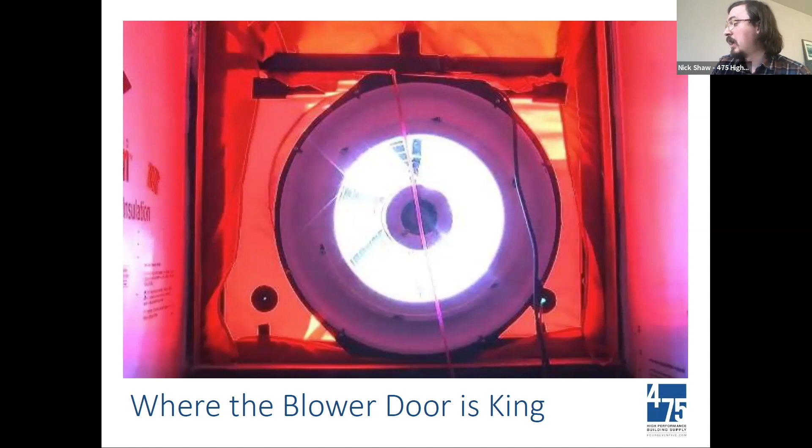I'll sound like a broken record about how important air tightness is. For those who don't know, the blower door is a giant fan used to pressurize or depressurize the building envelope, so on site you can literally measure how airtight the project is. That air tightness metric is something we work into our energy models and size our systems based on.

We do like to really prioritize air sealing. I'll be talking about air tightness, which is different than vapor control, which is different than water control, bulk water, which is also different than thermal control. All of this is a holistic approach where we're balancing these different things. But we prioritize air sealing a lot more than thermal insulation, thermal control, or vapor control, partly because air is where most of the moisture is coming from.

Air is inherently really wet, really moist. This is a study from the Building Science Corporation looking at one heating season, one winter. Gypsum is airtight but vapor permeable, so just through diffusion we get one-third of a quart of water move through it. But when we puncture a one square inch hole, we get 30 quarts of water. So air is really moist, it's really wet. We really want to prioritize air sealing.

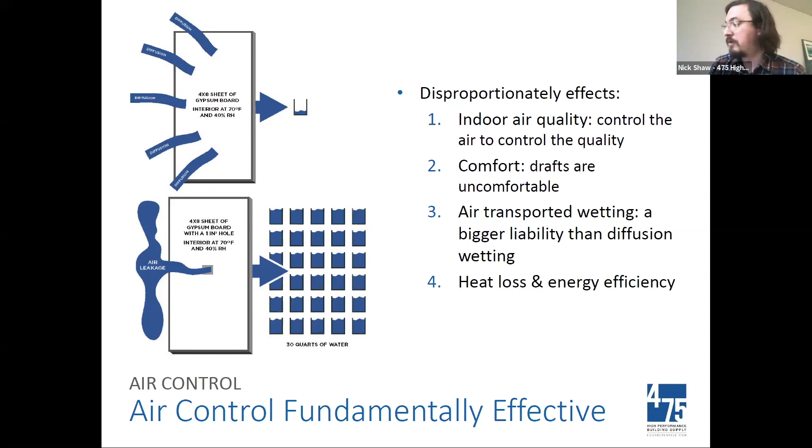Ideally, we prioritize air sealing on both sides of the wall assembly. On the exterior, where it'll be your house wrap, that's typically vapor permeable for climate zones 4 and up. And then on the interior, we're having it double as our vapor control layer using vapor variable membranes nowadays.

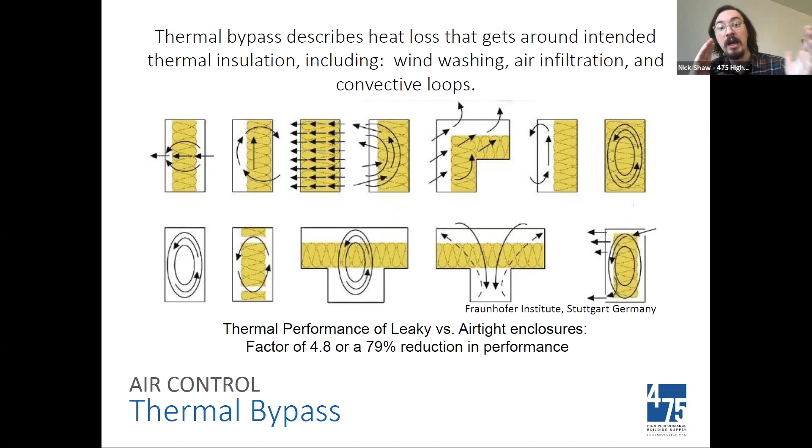Along with air being really wet, there's this idea of thermal bypass or wind washing, where you can get air convection loops moving throughout your insulation layer. When a manufacturer gives you the R value of a material, that's from a lab facility where it's airtight on both sides of that batt, board, or blown-in loose fill. A job site is not a lab facility, and things can go wrong, and we can get wind washing within our insulation layer. That can greatly reduce the R value up to 79%, so that's fundamentally a different wall assembly at that point. That's one reason why we prioritize having air sealing on both sides of our insulation.

This is the PHPP summary sheet, the International Passive House Certification Energy Modeling Program. It's actually the world's first passive house project, completed in 1991 in Darmstadt, Germany. This is just a theoretical exercise where we're leaving everything about the project the same—same R value, same building orientation, everything's the same. We're just changing how airtight the project is within the energy model to see how that affects our annual heating demand and our heating loads. It's in metric, but we can get the gist of it.

So 0.22 ACH 50, air changes per hour at 50 pascals of pressure—that's a volumetric measurement of air tightness. At 0.22, that's incredibly airtight. Passive house for new build is 0.6. So when we're at 0.22, we're showing 14 kilowatt hours per square meter, or 10 watts per square meter. That's extremely energy efficient.

That's very, very airtight. We then move to 0.6, which is the passive house standard for new builds under the international certification—we're now at 12 watts per square meter. We then move to 1.5, which I'd say is like the Pretty Good House approach, or what Building Science Corporation recommends—we're now at 17 watts per square meter. We then move to 3, which is current code for climate zone 4 and up under the new energy code, and we're at 25 watts per square meter. Then we move to 5 ACH 50, which is old code, untested, unverified, doesn't really mean much, and we're at 36 watts per square meter.

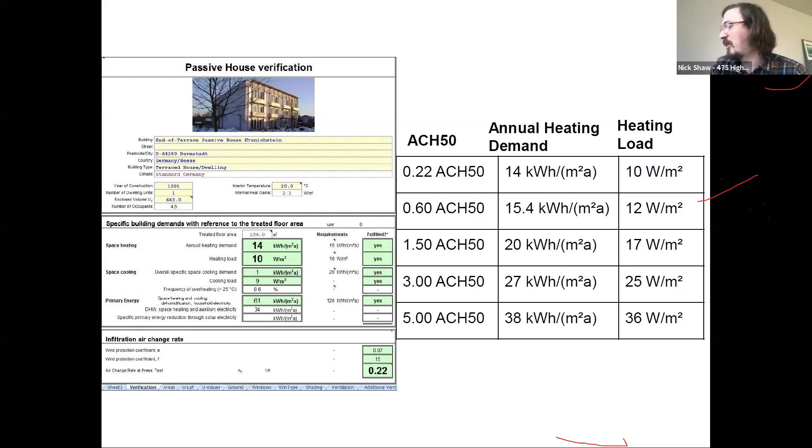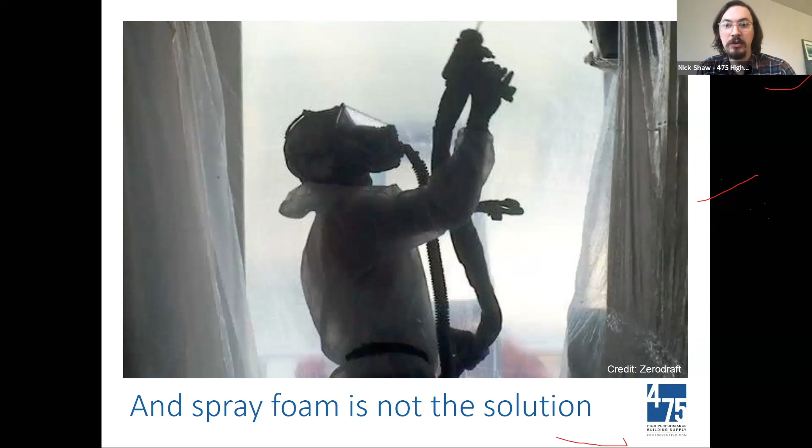So we're really prioritizing air sealing nowadays. At 475, we like to say less is best when it comes to spray foam or any foam-based material. We're not really seeing spray foam as part of the solution. Rigid boards can have their place when we're comfortable being vapor closed, but in general we want to avoid foam-based materials. It's partly because of the toxic ingredients—it does off-gas, it's a flame accelerant, it's unreliable for performance, it's actually not dimensionally stable and will shrink over time and uplift off of the substrate.

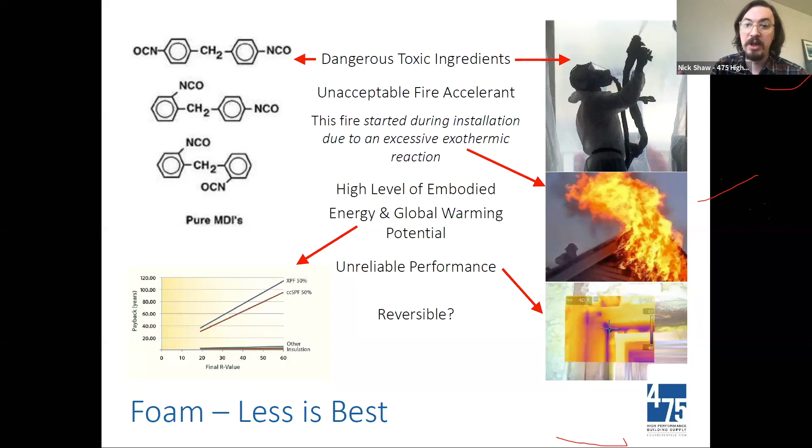But a big reason is the environmental impact. Passive House is really all about the operational carbon use—how much energy it takes to heat and cool the building. But we're also trying to consider the embodied carbon—how much energy it takes to extract raw resources and turn them into a building material. We know we need to prioritize this because climate change is a crisis. It's happening right now, and we need to do what we can to actively reverse or mitigate it. So we really prioritize embodied carbon, using plant-based materials—materials that were carbon sequestering when alive, then we cut it down and turn it into a building material so it's carbon storing. That would be like any plant-based material.

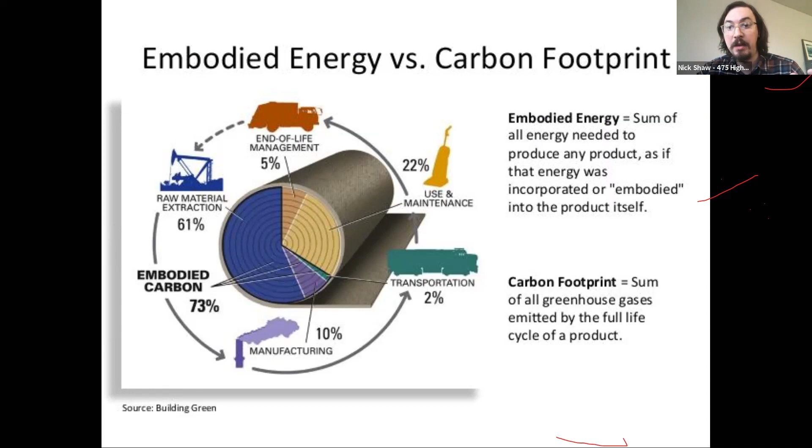There have been different studies done showing that, looking at 2050 as our timeline, operational carbon is a big component, which is what Passive House is all about. But our embodied carbon—our material sourcing—heavily outweighs our overall energy performance. That's carbon loading that happens on day one, while operational carbon use is over the lifespan of the building, how much energy it takes to heat and cool it. So we really need to address the immediacy of climate change, and we do that through our material selection, so we can actually make our buildings carbon negative or carbon storing for the lifetime of the project.

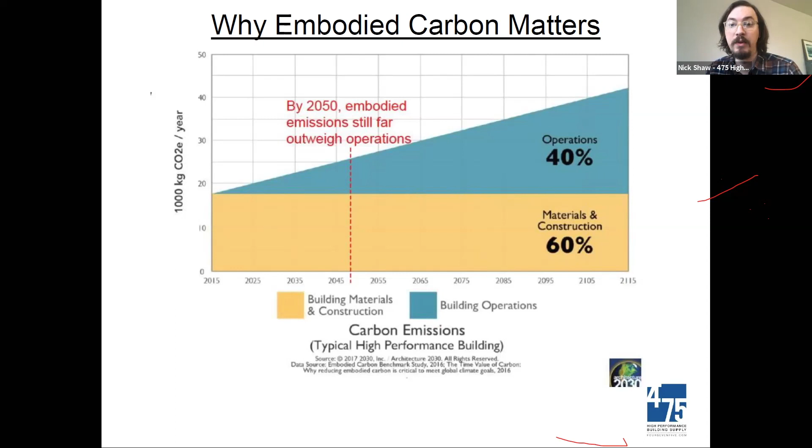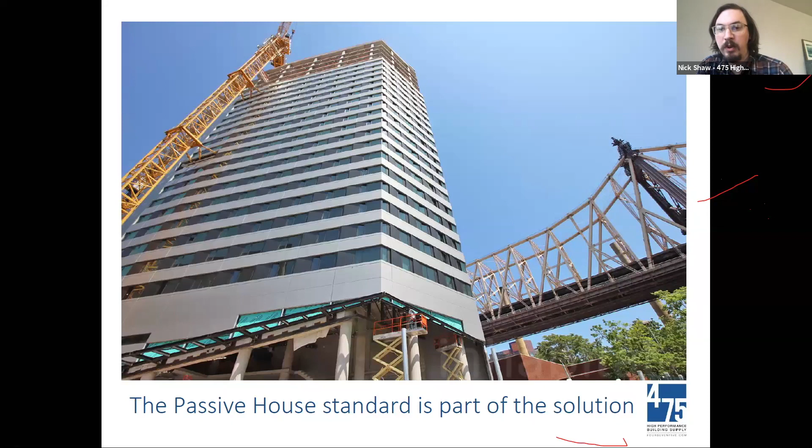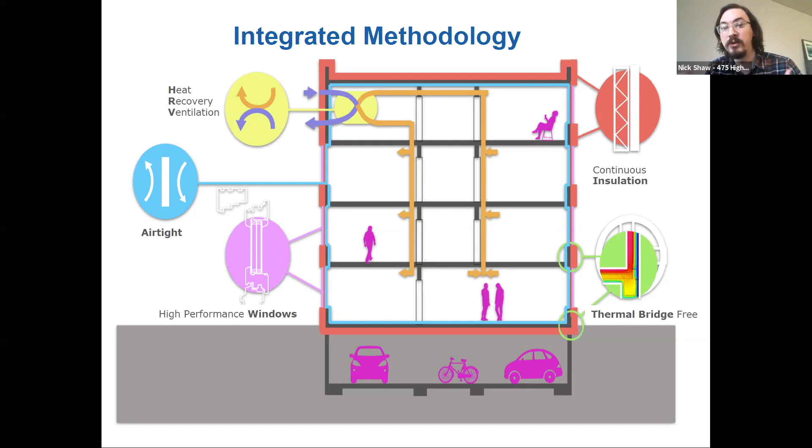This integrated methodology is rooted in continuous insulation, thermal bridge free - really thinking of the building like a thermos, which does mean we need to have triple pane windows that are airtight. We're making the whole building airtight, and then we're putting in some mechanicals - an HRV, heat recovery ventilator, or an ERV, energy recovery ventilator - to be supplying balanced, fresh air that is filtered and coming in at a comfortable temperature. So we make the building airtight, and then humans need to breathe, so we put in some active ventilation with an HRV or an ERV.

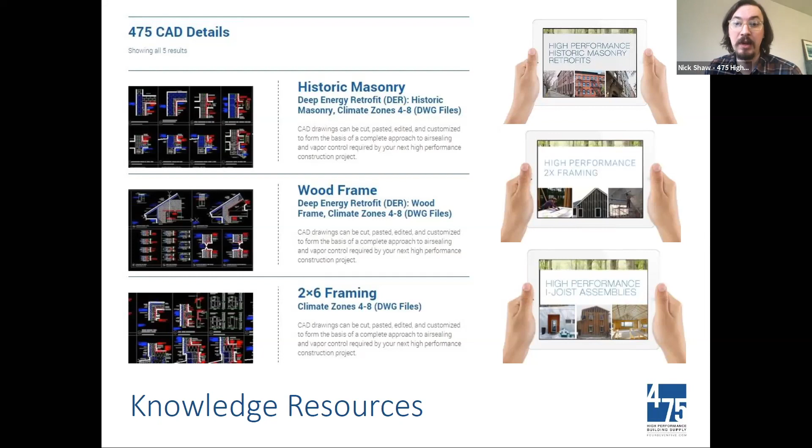So getting into the suite of materials that we offer - when I'm looking at wall and roof assemblies, I do have an order of importance of how I think about things. Shedding the water is number one - this is why we went into caves to begin with. Kick the water as far away from the building as possible. That's what architects are very familiar with. Then we're prioritizing air tightness, partly for the reasons I was getting into before, in terms of it holds a lot of moisture - it disproportionately affects other things.

We are building our walls and roofs very thick, or including a lot more materials, to really limit the amount of energy that moves through that assembly. Which means we're no longer baking our assemblies dry with our heating and cooling equipment, so we need to think about how that assembly is going to dry through diffusion. That's why we really care about the vapor permeability of the materials that we're using. Vapor control is different than air tightness.

Lastly, we're looking at thermal control, or R value - trying to be thermal bridge free, or really prioritizing having those warm interior surface temperatures, which will reduce condensation issues, but also create a much more comfortable interior for our occupants.

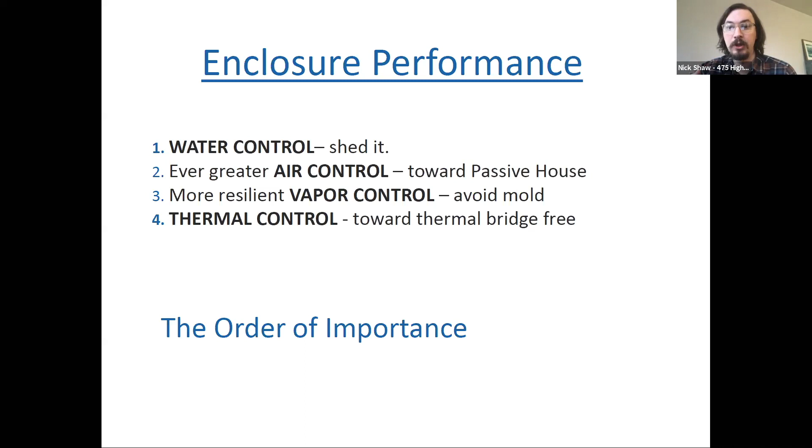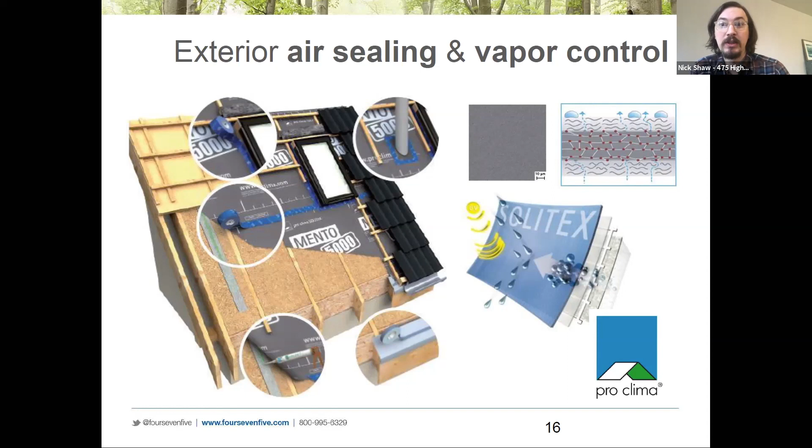The suite of things that 475 offers - we're offering membranes, tapes, gaskets for the exterior side of our assemblies. These are monolithic membranes that require active vapor transport along a molecular chain. Most technology previously available in the States was microporous membranes - these are membranes with little pores within them, and that's how they allow moisture to pass through. Those pores can clog or deteriorate over time, and wood tannins break down those micropores. So we're offering a suite of materials that are higher performing, more durable.

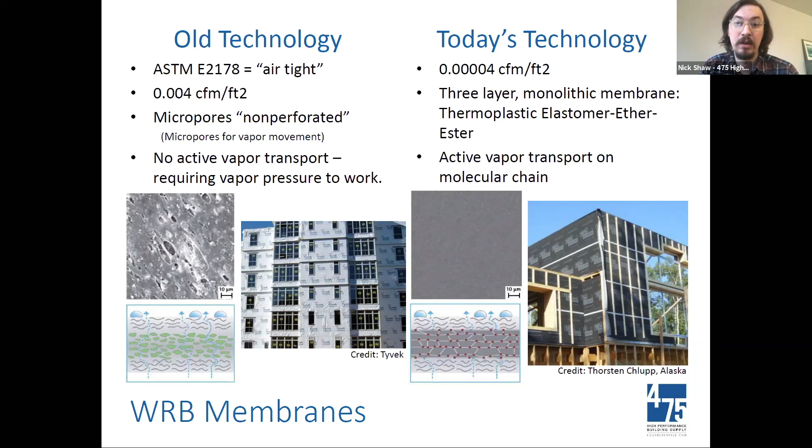What's nice about it being monolithic is that we can have the same membrane be the wall as well as our pitched roofs - that would be the Solitex Mento membranes or the Adhero membranes for a fully adhered version. So these are truly airtight, truly watertight, but vapor permeable or vapor open membranes for the exterior side of our assemblies. We do like to prioritize a rain screen for our walls, creating a drainage plane and an air gap behind our finished cladding for the walls.

If we have vertical siding, then we need to do what's called a counter batten approach, which is two layers of battens. Whatever's against the house wrap, your WRB, needs to be running vertically to allow that airflow and drainage. We're doing a similar thing for our pitched roof systems as well.

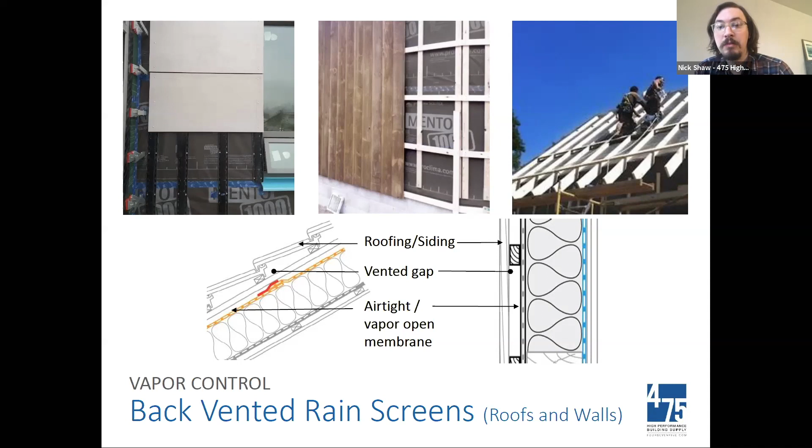I would say if you're having a roof pitch of 3-12 or greater, it is best to vent those pitched roofs. Oftentimes we want to have rafter tails for an aesthetic look or to create bigger eaves to kick the water away. That can be a thermal bridge concern, and with the rafter tail, it's also an air leak concern. So we're oftentimes doing what we call applied rafter tails.

Here on the left image, we're showing the same membrane as the wall and roof, acting as our water resistant barrier. Then we put in these notched timbers that are acting as those rafter tails, and we use that to start and then create our vented roof assembly, allowing drainage and airflow from the eave to the ridge.

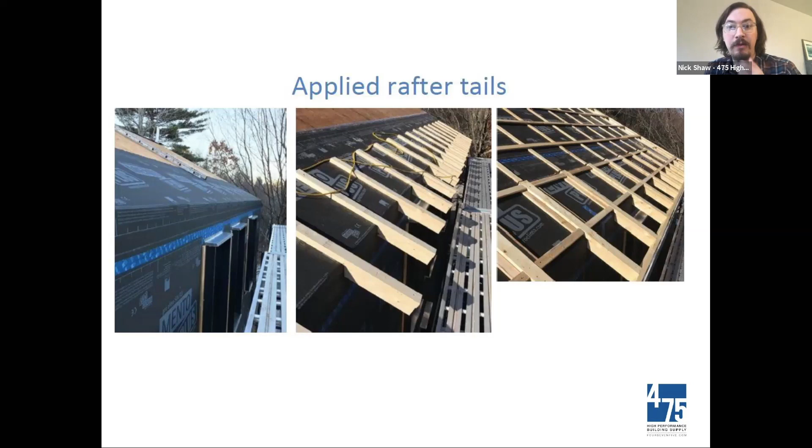You can vent lower pitched roofs, but you then need to make the vented gap even greater. But we are not venting flat roofs. Flat roofs need to be vapor closed up top because we could have standing water in those locations.

We have mechanically fastened membranes, but we also have peel and stick membranes, fully adhered membranes. This is the Adhero membrane. It's a really good solution for mass timber projects, really great to have all plant-based materials, full plant-based assemblies, whether it's CLT Cross-Laminated Timber, NLT, or GLT. These are different types of wood panels that can be acting as a structure as well as our interior finishes.

So for multifamily projects, we're using the Adhero membrane as that CLT protection on the floor to keep the assembly dry during the construction phase.

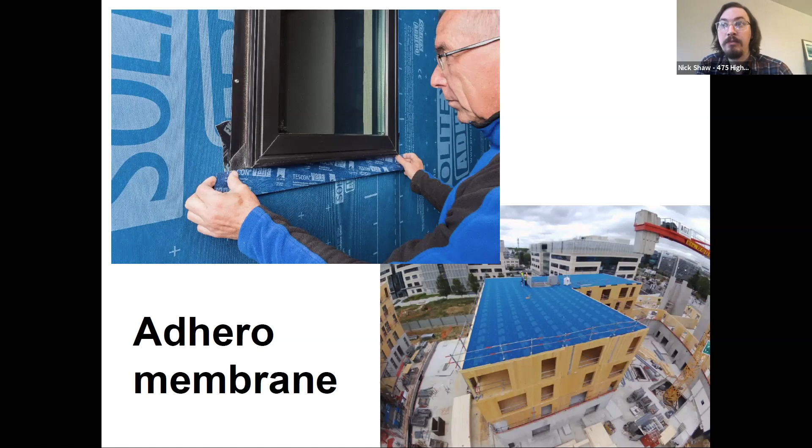Similar suite of materials, we offer fluid applied, which means brush on, spray on, or roll on air barriers. This is the Visconn, where we're using it to treat any uneven surface, such as masonry, but also to help with a lot of air barrier transition details.

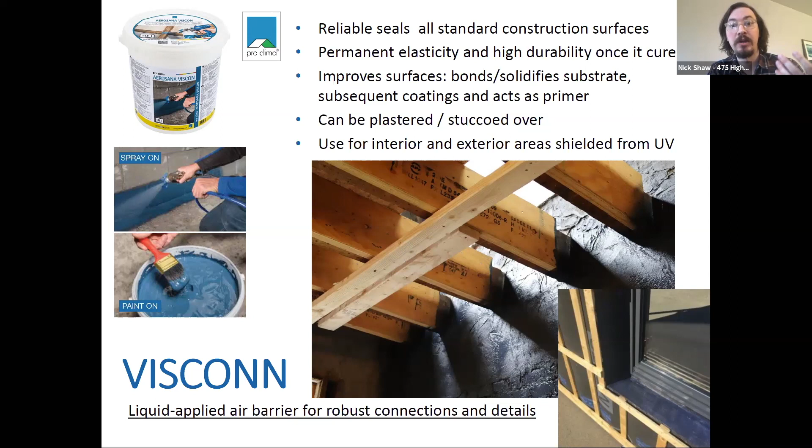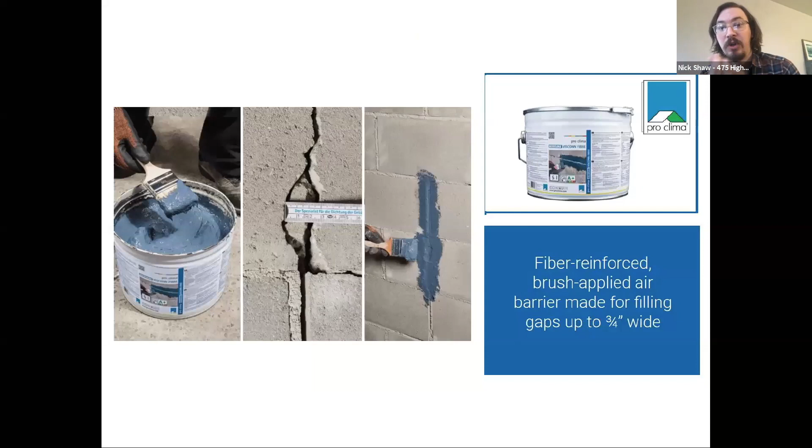Sometimes it's difficult to place a membrane, so instead we can be coating some framing or other material in the Visconn to act as that air barrier transition. We have the standard Visconn, but also a version with fibers built in that can bridge larger gaps. The standard version can bridge 1/8 of an inch, while this fibrous built-in one can bridge more like 3/4 of an inch. Upcoming, we'll also be offering a version of this that comes in sausage tubes.

And then there's this spray gun that attaches to your standard air compressor. This is a way where you don't need a different type of airless sprayer for the application—you can be using your standard nail gun compressor for this.

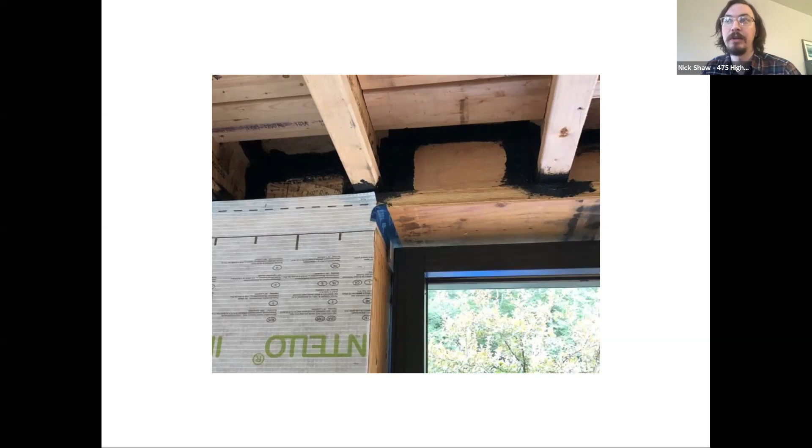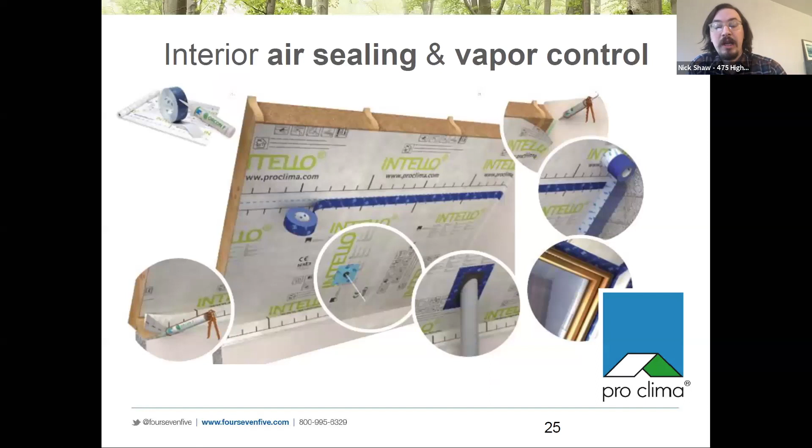Focusing on an interior air barrier, we offer a suite of gaskets, tapes, and membranes for the interior side of the insulation. Here we're showing the Intello membrane. The Intello membrane is actually vapor variable, so it is airtight, but changes its vapor permeability based on the relative humidity around it.

In the winter time, our vapor drive naturally moves from the interior towards the exterior. Cold air is drier air and holds less moisture, so we have a lower relative humidity. This membrane acts as a class 2 vapor retarder at 0.17 perms.

Our vapor drive actually changes direction in the summer. It's hot and humid outside, more comfortable on the interior, so the natural vapor drive comes from the exterior in. We have warmer air holding more moisture and a higher relative humidity. This membrane becomes vapor open, or vapor permeable, up to 13.2 perms, allowing the assembly to dry inwards through diffusion. We're opening up before we're at risk of mold growth.

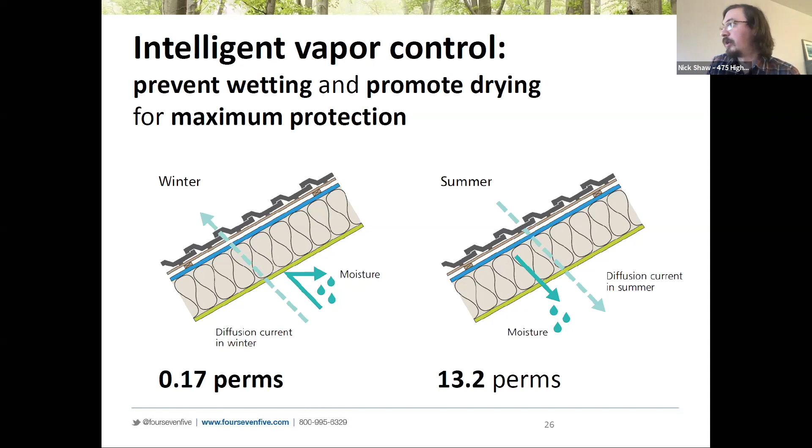At about 70% relative humidity is really a throttle point, where we want to go from as vapor impermeable to as vapor permeable as possible. Mold grows or accumulates at about 80% relative humidity, anytime you're above 41 degrees Fahrenheit, below about 104, at 80% relative humidity. So we want to allow the assembly to dry inwards through diffusion before we run the risk of mold growth, which is why that 70%-ish relative humidity is kind of a throttle point.

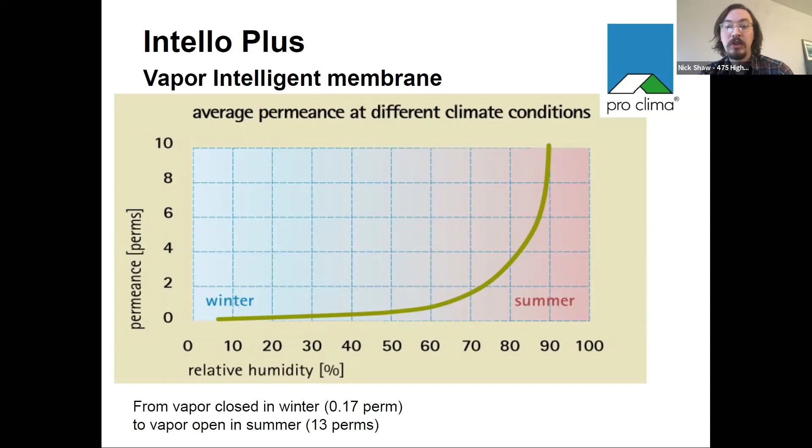Some other membranes open up too soon or too late, and we've really found through testing that this Intello membrane opens up at that sweet spot. So we're greatly reducing moisture risk within our wall and roof assemblies.

In general, we do want to prioritize an interior air barrier. There are two different approaches for durability of these high performance assemblies. One is to do a dew point analysis, putting enough exterior insulation to warm the sheathing layer. That's a fine approach, but it doesn't really account for how quickly our climate is changing, and we've been seeing more natural disasters and greater changes in weather patterns, showing that we can't really work with existing climate data as much.

So another approach is having an interior air barrier. This holds your warm conditioned air off of the colder sheathing surface. Now we don't worry so much about that dew point analysis, where we're letting the sheathing layer get colder - we're just holding our warm air off of it. That's how we're preventing condensation against that sheathing layer.

It also means the air barrier is in a location where you can mend and fix it. So if your builders aren't quite hitting the blower door numbers they want, they're able to access that air barrier and fix it up. It can now also double as your vapor control layer, and that's where that vapor variable membrane with the Intello becomes really key. Just having an interior air barrier that's vapor permeable is really helpful, but you get even greater risk reduction when that interior air barrier is vapor variable, or smart. That's what the Intello membrane is offering.

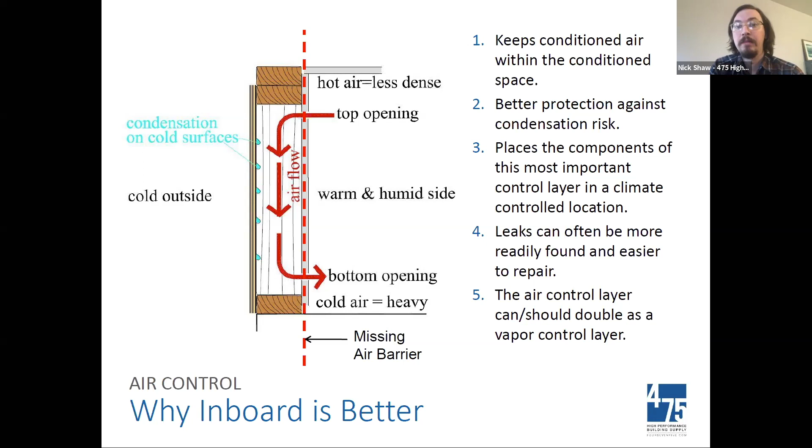This is right behind the drywall, and we need to protect it. Think of the drywall as a sacrificial layer, not as an air barrier. You can go online and read about the airtight drywall approach, but it has a lot of durability concerns - every time you hang a picture, it's compromising that drywall airtightness.

Instead, we're running a service cavity. This protects that Intello membrane, but it also creates a chase for us to run our electrical equipment, so we're not piercing or interrupting that Intello membrane. It makes our buildings more adaptable - it means the next homeowner can come in and run new electrical without interrupting the rest of that structure, that's good for 100+ years.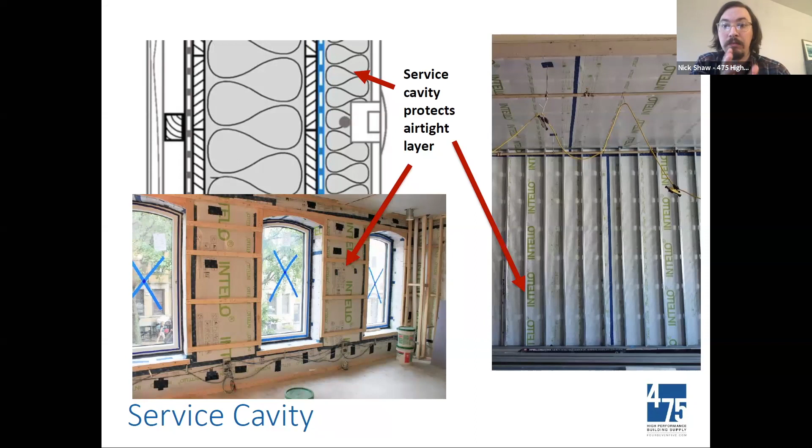So we're allowing access to certain areas of the assemblies while limiting access to other areas that have longer timelines for maintenance. This is also a location where you can throw in another batt of insulation if you need some greater R value. The depth of the service cavity is really just based on the depth of your outlet boxes, or whatever you want to place in there. I am seeing plumbing being kept all on interior walls, because those are much bigger diameter pipes, which would make our exterior walls even thicker.

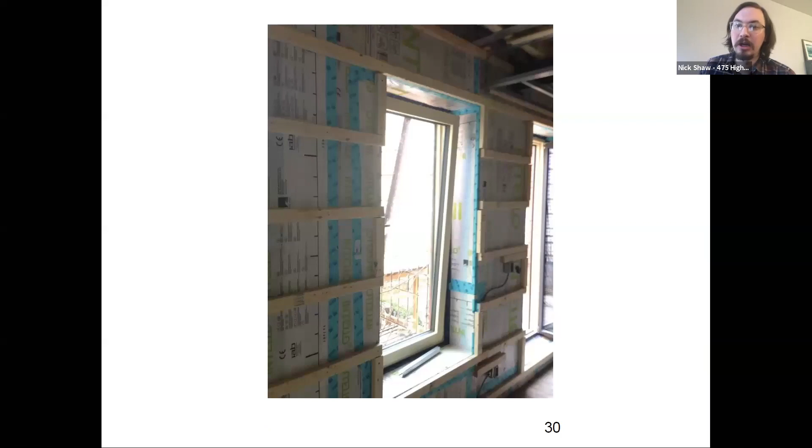Here we're showing that service cavity coming into a tilt turn window. The window is being taped directly. The window is your air barrier in that plane, as well as your vapor control layer, your insulation - we're asking a lot out of our glazing. We are using triple pane nowadays.

That interior air barrier will pose sequencing concerns for your contractors. They need to know about these interior air barrier transitions, and this does happen at the framing stage of things.

So the image on the left is a construction team putting in just a sliver of this membrane, or a floppy bit, as we say, of the membrane. And then they come in and frame in an interior wall. If they didn't place this little floppy bit of membrane, now that interior wall is interrupting where we would want that air seal. So that does complicate these types of details. If they know and have this air barrier on site at the right time, it will keep the costs down.

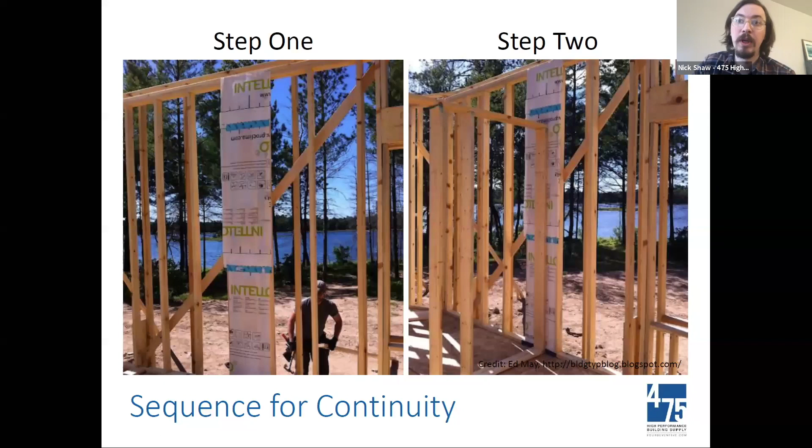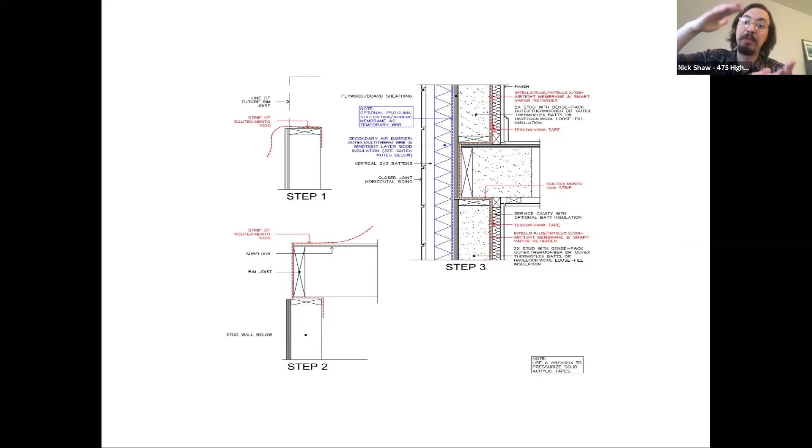This will happen at our floor transitions as well. You can just put a ledger directly over it and run a continuous seal. Or a lot of folks call it wrapping the rim joist, where you're putting the floppy bit of membrane onto the top plate, setting down your floor structure, lapping this membrane over and around the rim joist, and then framing your next wall on top of it. So your subfloor assembly is pinching the membrane between the top plate and bottom plate of the walls above and below, and now you have these floppy bits of membrane that you can tape down the line.

So you will see these loose bits of membrane on site during the framing process of these projects. This is just keeping folks moving real fast and staying on schedule, but it is something that they need to know about and have these materials on site during the appropriate times.

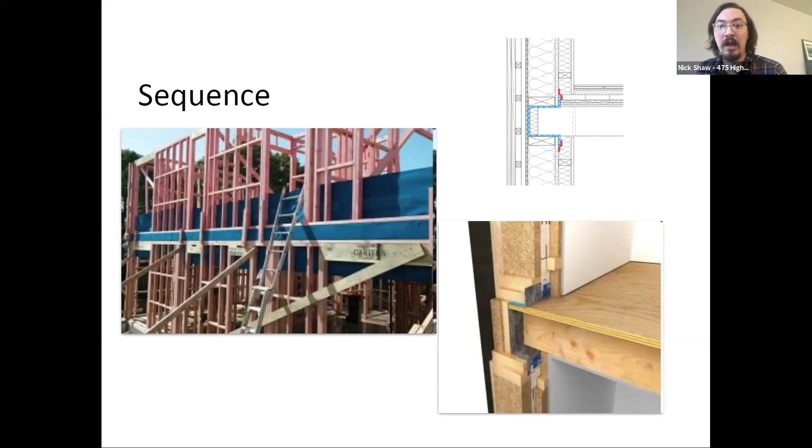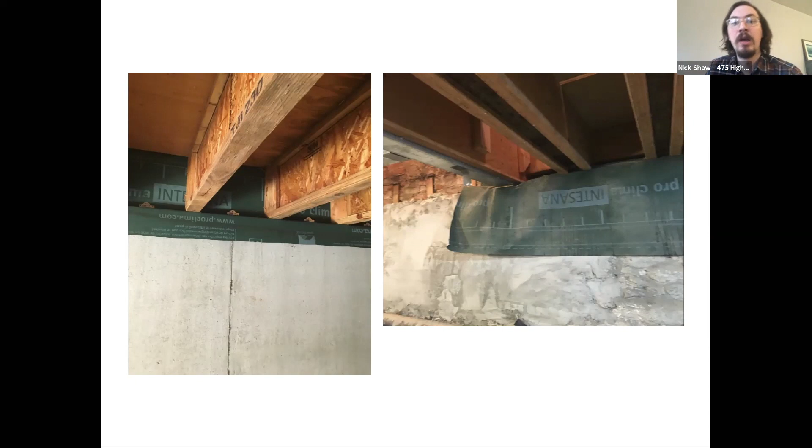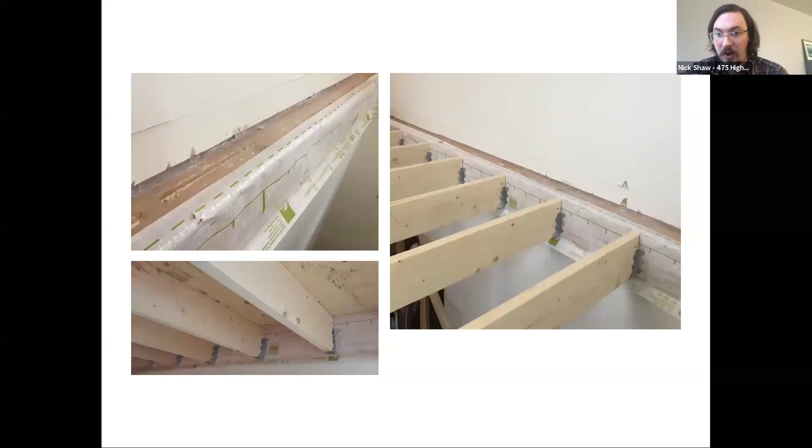Here we're showing just placing this membrane during the framing stage. We like to use a fairly robust membrane at this location, that can be the Intello X membrane or the Mento membrane, because we are creating quite a few pinch points where we want to make sure we're not tearing the membrane. You can fasten directly through the membranes, install with staples. You just want to hit the structure behind it to pinch the membrane at that fastener. Here we're showing just placing your joist hangers directly through the membrane, and now you're taping to it above and below. So there's a variety of ways to do these types of air barrier transitions.

Flat roofs, kind of coming back to that for a second. For flat roofs, we are not venting them. There's no pitch to create a pressure differential. The pitch is solely just for some drainage. We will have standing water up there. So we want to be all vapor permeable because the top is vapor closed. Or if we are using a rigid foam board, we want to make sure we're not creating a vapor sandwich with anything plant-based in between, nothing that could break down or deteriorate from moisture damage. So if you're topping with a rigid foam material, make sure your protection board is a masonry sheathing board and not a plywood or OSB plant-based material.

On the underside of the deck, we're getting a lot of fibrous insulation, natural vapor permeable, that could be mineral wool batts or cellulose, and then we're running the Intello membrane on the underside. The Intello becomes particularly key, one, to have an interior air barrier, but two, for that vapor variability, because the exterior is vapor closed. So now we can't dry through diffusion towards the exterior, so we can only dry inwards. We don't want to moisture load the assembly when it's trying to dry inwards.

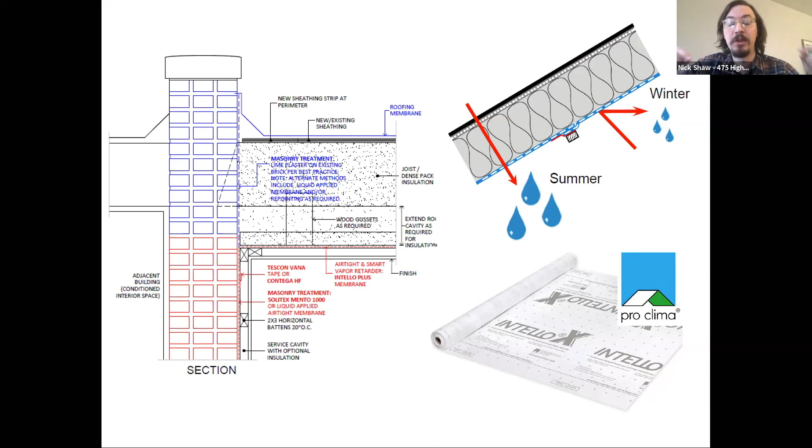So check out, we have a blog post specifically called 10 Golden Rules for Foam Free Flat Roofs, and that'd be a good blog post to be looking at for flat roofs. They are inherently tricky, and now we're also mounting photovoltaics up top. We're putting a living roof up top, which is making things even riskier because now we're not getting the solar gain on that membrane to push the vapor drive inwards, but it's still achievable.

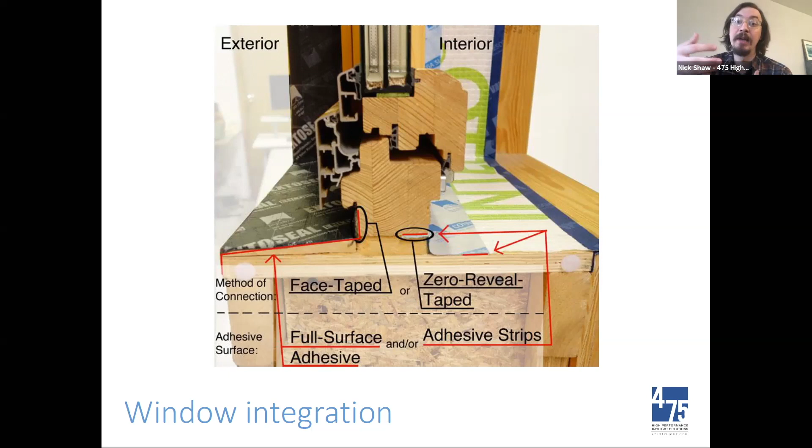We are taping to our windows and doors. The caulks that folks used to use would harden and crack over time, so it's not a reliable air seal. We also want to be vapor permeable, so we're not can-foaming in windows anymore. We're vapor closed on the exterior sill because we could have standing water on that horizontal surface, but otherwise we want to be vapor open as much as possible. We don't want to vapor dam, especially where we have a high temperature difference, which is more likely to have condensation concerns right there.

The corner taping is a little bit of some funny origami with the tape. I do oftentimes have contractors pre-cut their corner taping, go around and install just the corners, and then come back and do the rest of it in long strips.

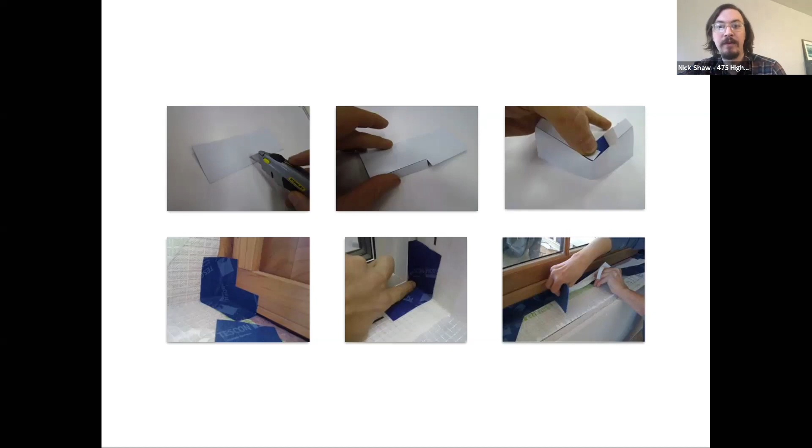It's an easier way to maintain quality control because the corners are the higher risk point for these installs. We can pre-tape windows. Triple pane windows are incredibly heavy, and not all projects have the opportunity or luxury to be able to put it on a sawhorse and pre-tape it. But if you are able to do that, it will really simplify things.

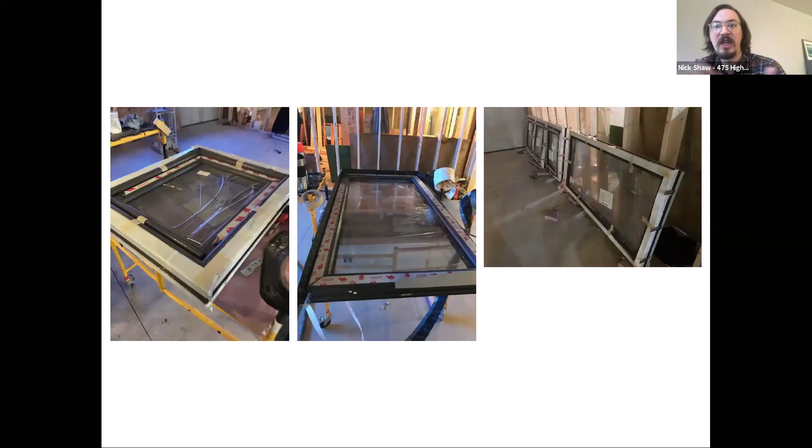You use painter's tape just to hold your air sealing tape down in the meantime. Then you set your window in place, stuff your fibrous insulation. Here we're showing mineral wool, and then fold that tape up and get your final air seal connection there.

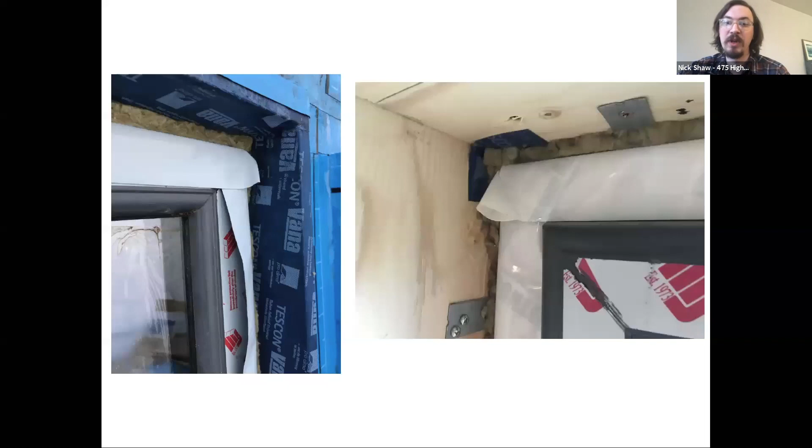Here we're showing a plywood buck on the right and some Vana on the left image. For the plywood buck, you would want to tape the seams as well as the end grain of the plywood, since that's where you can get air movement between the plies. Less of a concern with OSB since it's just a bunch of glue, but OSB tends to be more vapor closed, more of a true vapor retarder. So we prefer vapor permeable sheathings typically.

Into the mechanical systems that we offer, heat recovery ventilation. These are directly through the wall, no ducting needed. This is from Lunos as the manufacturer, only available in the United States through 475.

There's the E2 system, which works in pairs. When one unit is exhausting, the other one is supplying air. Then there's a different system called the E-Go that's designed for restrooms. It's a single hole through the wall, but there's two fans in there, so that's how we're still keeping a balanced ventilation. The E-Go has an exhaust-only mode for when you're taking a hot shower.

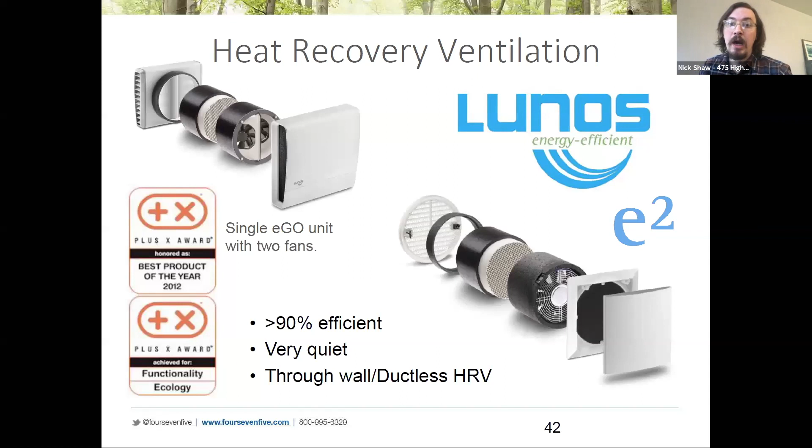You don't need a system in each room, you just need to allow airflow from one unit to the other. So we're undercutting doors or somehow allowing airflow from one unit to the other.

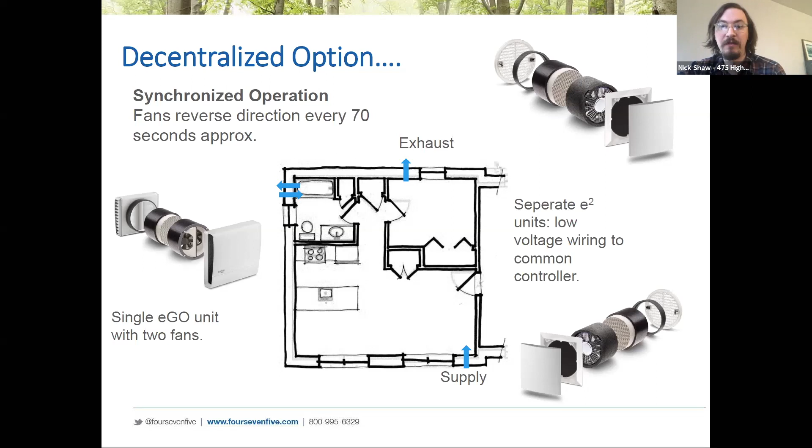We're doing a lot of single-family homes with this Lunos system. We're also doing a lot of multifamily, where the Lunos is used just for direct fresh air for the apartment units, and then typically there's a centralized ducted system for the stairwell or other shared spaces. It's really helpful, this through-wall HRV. Whenever you don't want ductwork, Lunos will be helpful, and it's really nice for renovations for that reason as well.

Staying within our mechanical systems, domestic hot water heater. It's a heat pump water heater where the tank is separate from the heat exchanger, so the heat pump lives outside of the building envelope, and there's just water piping connecting the two. The refrigerant is carbon dioxide, fully contained within the heat pump. So this is not a mini split, it's not a VRF system, it's just water piping connecting the two, only for domestic hot water use.

You can have multiple tanks to one heat pump or vice versa, and that's how we're sizing this for a single family home or multifamily, everything in between.

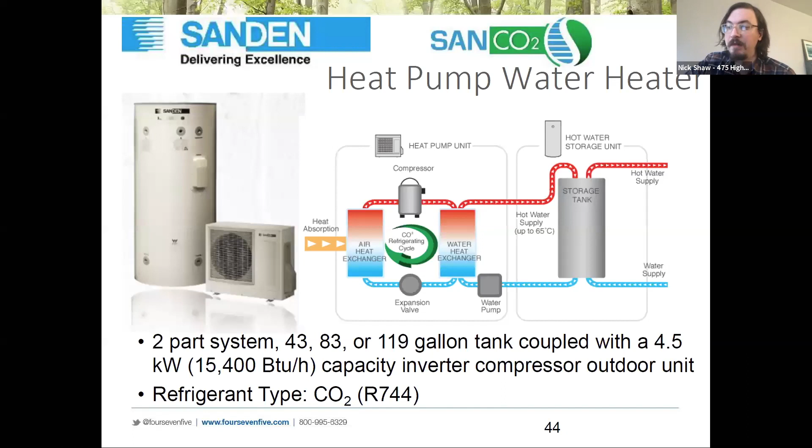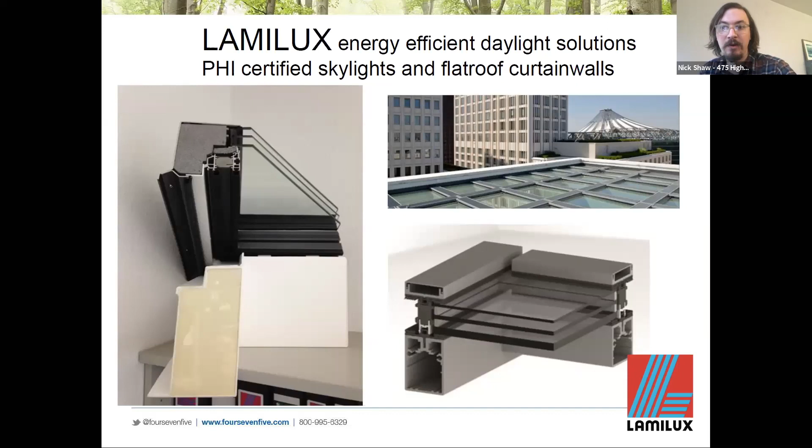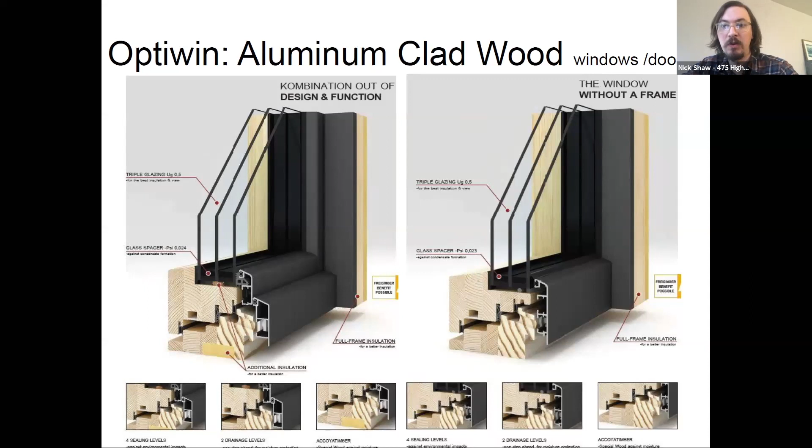Also windows and doors from OptiWin, triple pane wood framed aluminum clad windows and doors. Again, high performance, Passive House appropriate.

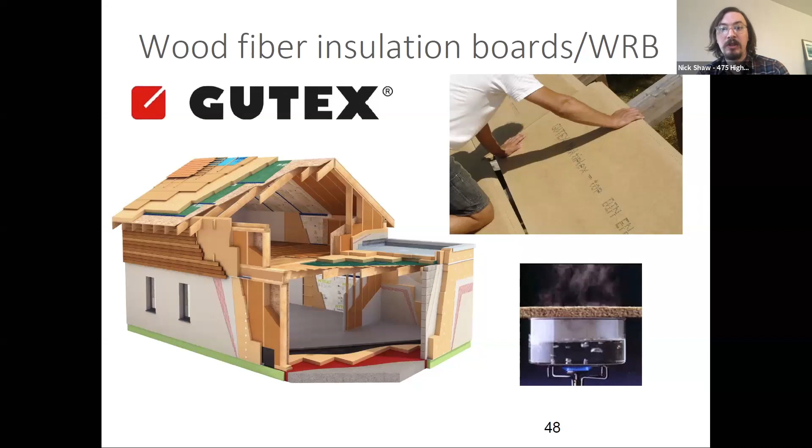Getting into the insulation that we offer, this is Gutex wood fiber insulation, manufactured in Germany. There's different types of Gutex boards. It comes in boards that are tongue and groove that can actually shed water on the exterior. There's also butt joint boards, there's batts, there's blown in, really good thermal performance, really good acoustical performance, vapor permeable, and can act as your house wrap or roofing underlayment for pitched roofs in one.

So it's really nice when we're getting dual function out of one material. This will replace your house wrap and exterior rigid insulation. It is not structural, you will need to have something to pick up your shear strength.

We can offer a 1 hour fire rated assembly. It's a Class B fire rating. Currently not quite tested to a 2 hour fire rated assembly, but we have options for 1 hour fire rated assemblies.

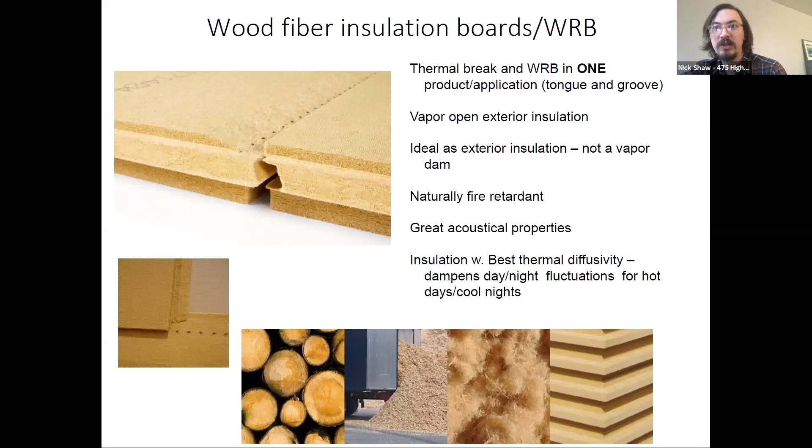Getting into the embodied carbon side of this, wood is fantastic. When it's alive as a tree, it's sequestering carbon out of the atmosphere and stores that in the wood fibers. We then chop it down and turn it into a building material that locks in that carbon storage for the lifetime of the project.

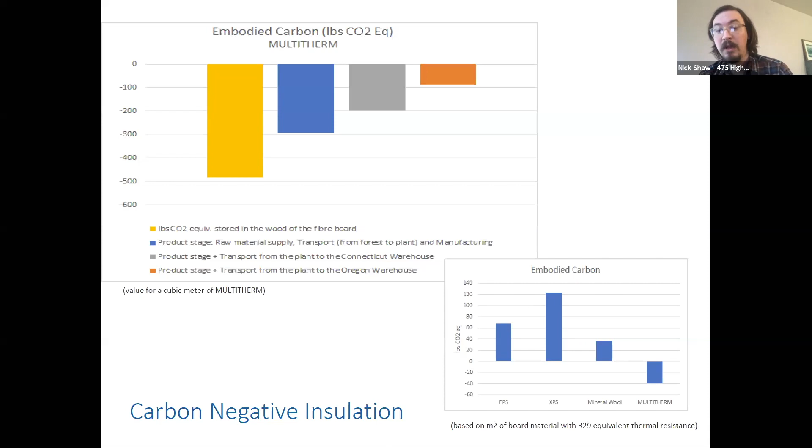Cellulose or Multi-Therm, the wood fiber, that's where we're getting carbon negative. And then best case is actually when we're using agricultural waste products, plant-based materials that would otherwise get decomposed or somehow have the carbon released back into the atmosphere. So we really want to prioritize negative embodied carbon materials or plant-based materials.

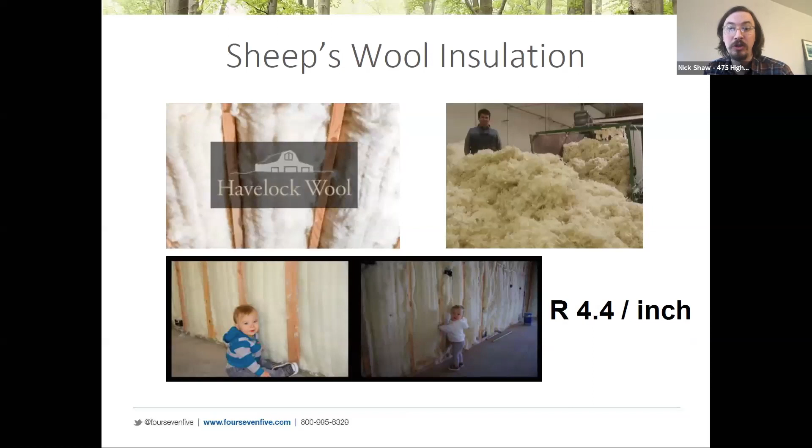Sheep's wool insulation has a really high R value per inch of 4.4. It comes in batts or blown in, and is a really good option for DIY homeowner driven projects, doing a lot of tiny house and van renovations with this type of material.

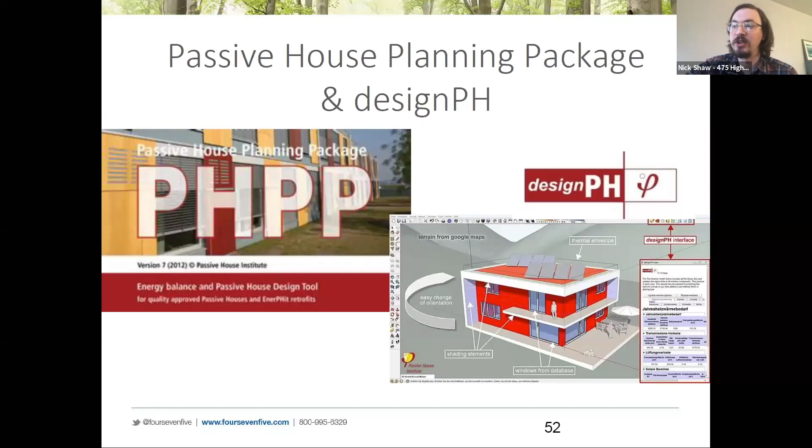And then we have Design PH or the PHPP - these are the giant Excel sheets that are used for the International Passive House certification.

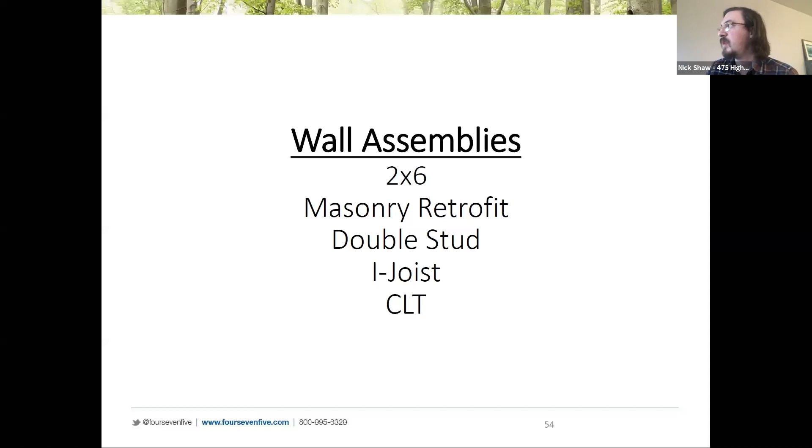But first, looking at a 2x4 or 2x6 assembly. On the right is the interior, so we have our drywall finish and then our service cavity, which we can insulate with batt material or leave uninsulated. Then we're installing the Intello Membrane, the Intello Plus for wood framed, then we're putting in blown in insulation or batt, something vapor permeable within our cavities - that could be cellulose, mineral wool, or fiberglass. Then we're having our structural shear strength or sheathing, whether that's plywood, OSB, or diagonal strapping.

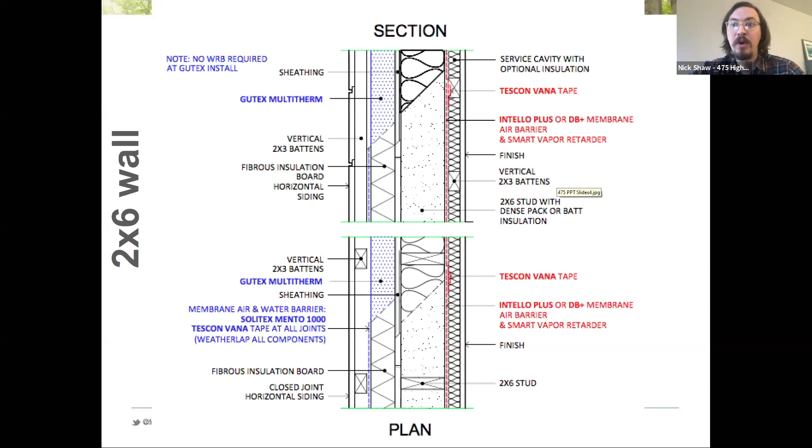If we were using mineral wool, then our house wrap would be placed against that sheet good of the plywood. If we're using Gutex Multi-Therm, then that acts as your true house wrap. So then we're just having the rain screen outboard of that, and then we're hanging whatever siding on outboard of that. Just a different image of the same assembly.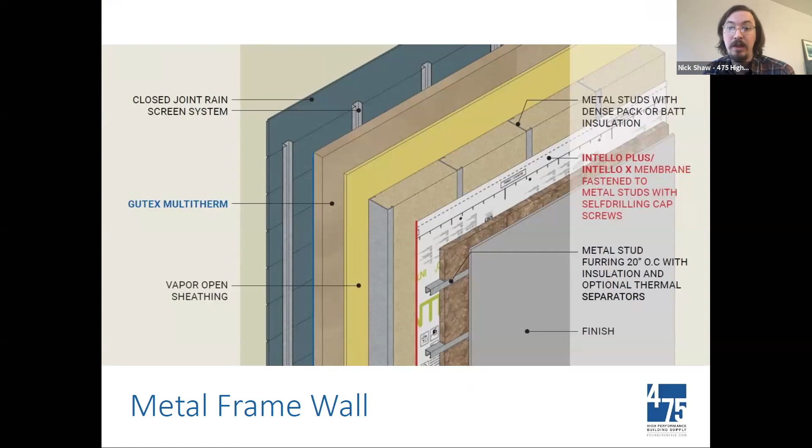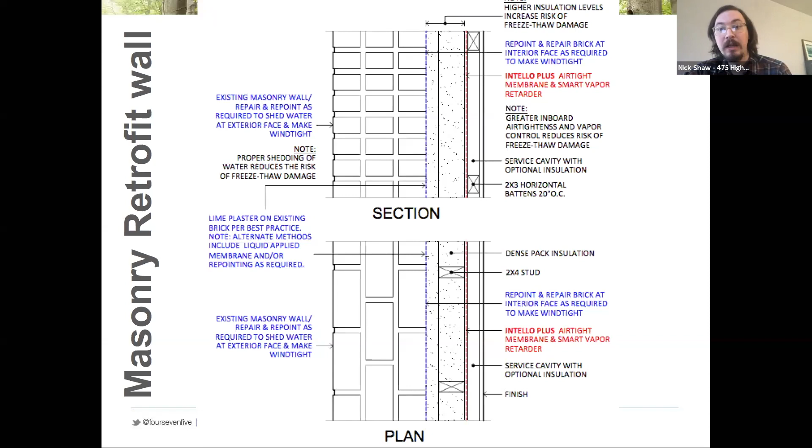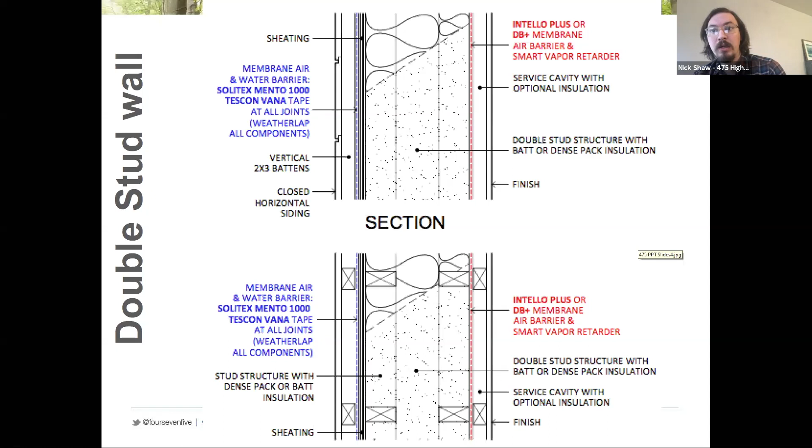Double stud assemblies, big fan of double stud. We have our interior finish on the right. We have our drywall, our service cavity, our Intello. We're then distancing our stud framing based on how much R value we're trying to get in there. We're typically using cellulose for a double stud assembly. We then have our shear strength on whichever wall is structural. That tends to be the exterior wall, but it can be the interior one. Then we're running a house wrap that's vapor permeable. That'd be the Mento membrane or the Adhered membrane. And then we have our rain screen and siding.

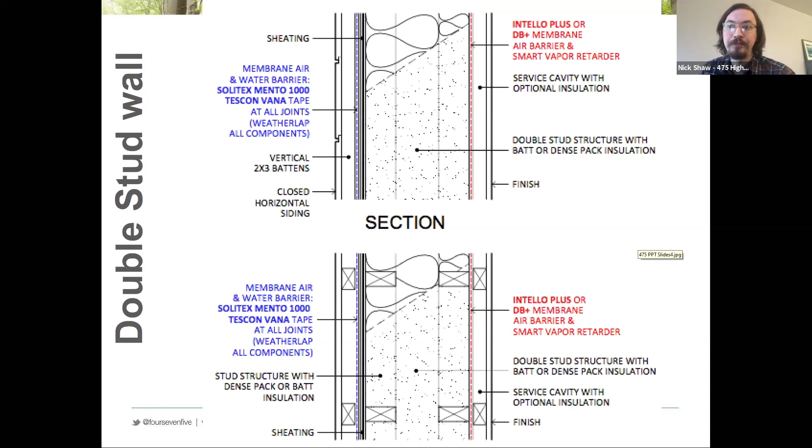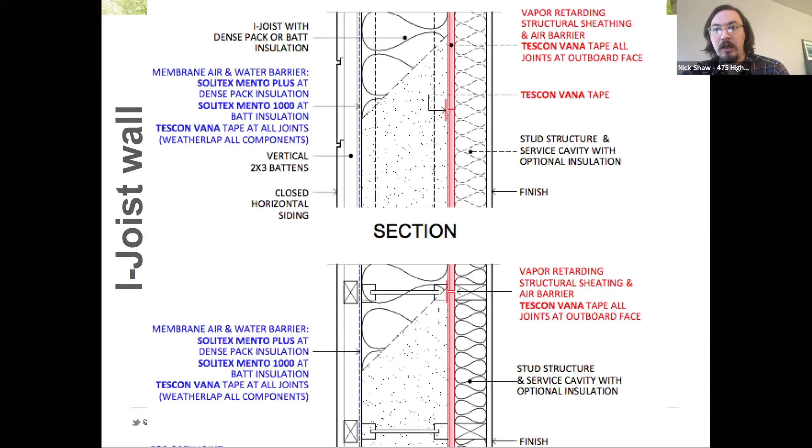Just a different view of that. And then lastly, we're showing a CLT, Cross-Laminated Timber. This is where the wood is our interior finish and structure. We then air seal with the Intello membrane that's also acting as our vapor control layer. And then a really thick layer of the Gutex wood fiber that's acting as our house wrap. And then we have our rain screen. Same thing for a pitched roof.

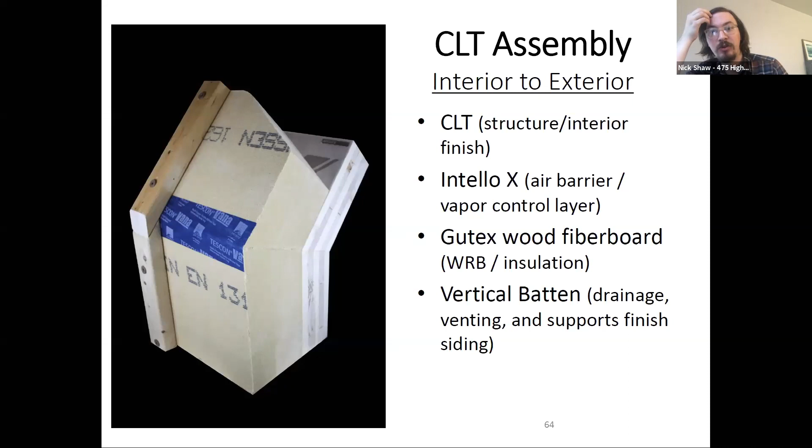But thanks so much for taking the time, and now we can be opening it up to conversation.

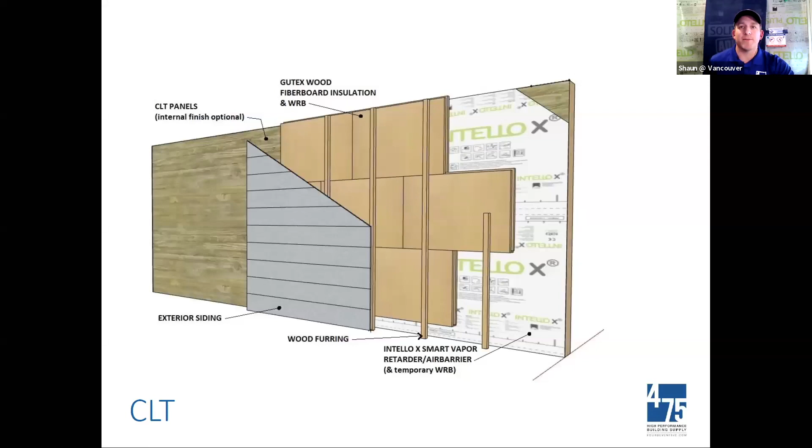Okay, cool. Now I can't remember what question I asked because I did several of them. Let me go to the very beginning here. Let me see, I think my first question was...

The blower door reading - everybody's always talking about air tightness at the 0.6 air changes an hour for passive house, but that doesn't necessarily mean that you meet the 4.75 heating and cooling requirement. Is that correct? Correct. The heating and cooling sizing of the system is different than air sealing. They do affect each other - how airtight your building is will change your heating and cooling demands and loads, but there are different metrics within the passive house standard that you're trying to hit. So one is annual heating and cooling, a different one is air tightness. It is this integrated methodology where we're looking at it holistically. So air tightness is a pathway to these other performance goals.

And I think I asked - I was just wondering if anybody prefabricated different sides of those applied Raptor tails.

I know that raptor tails are made on site by most people, but if you're using a template and cutting these things, hopefully the carpenter keeps the pattern consistent, because we want a really tight fit against the building without gaps. Someone mentioned you might want to go to your local truss company and have them make these for you. I was wondering if there's a manufacturer that, if given the details, might be able to make those raptor tails.